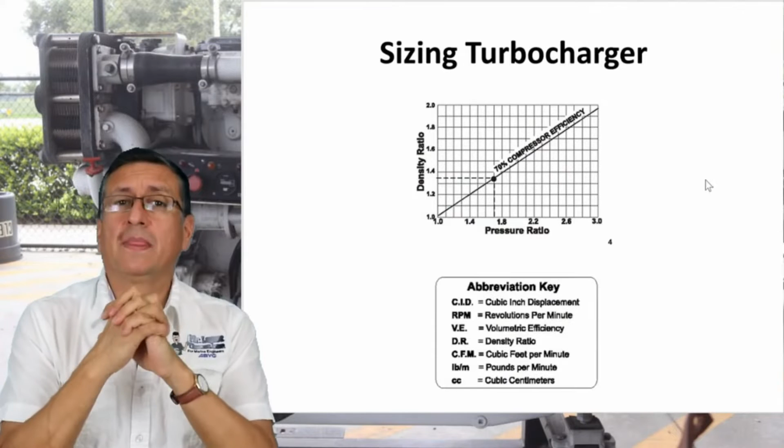The first step is verify with the manual of the engine, verify with the manufacturer of the engine if that engine is recommended supercharged. If the manufacturer recommend install a turbo or supercharger on that engine.

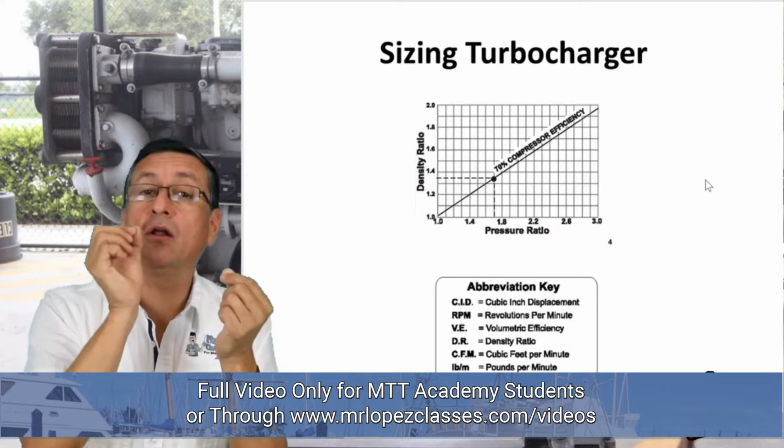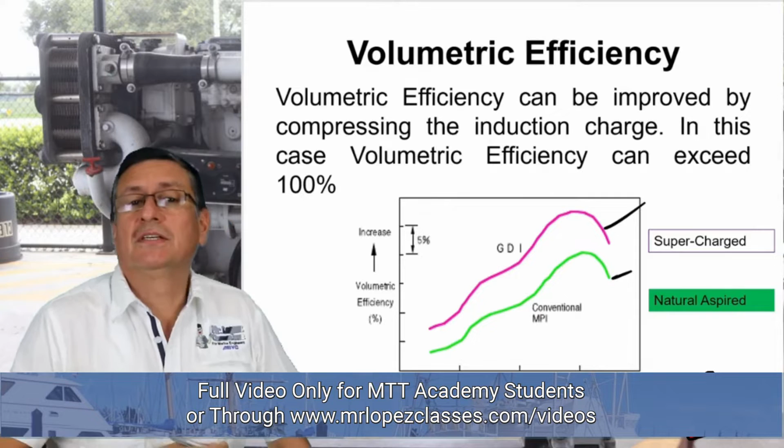This is good. Okay, we are going to verify what happened. How is that procedure? Look at this. In a typical diesel engine naturally aspirated, the volumetric efficiency is around 85%. In decimal terms is 0.85.

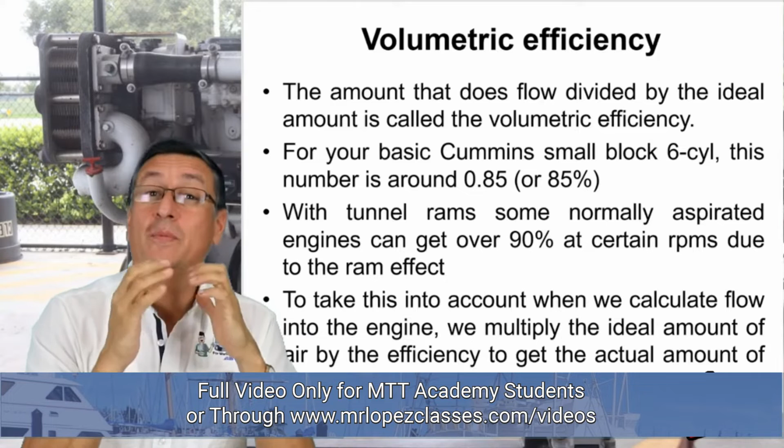But when you port the head, when you polish the ports, the intake ports and the exhaust ports, the volumetric efficiency increased 5%, around 90%. If additionally you added the turbo or the supercharger, you are in the limit in 100 or a little higher. Wow. Alright? If you have the chance, port the head. Polish the port, the intake ports and the exhaust ports.

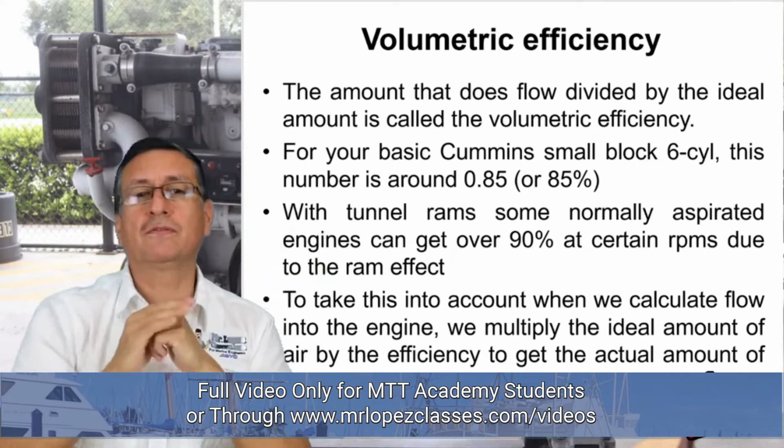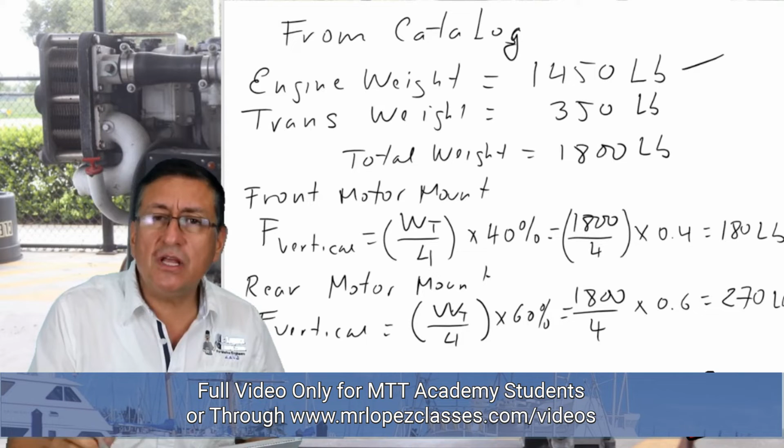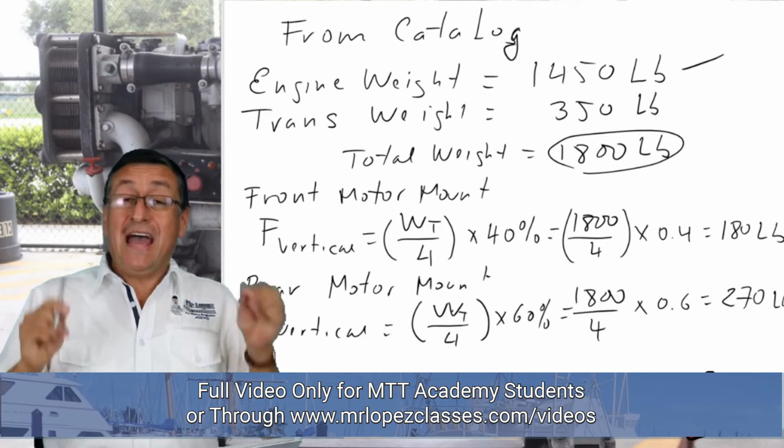Other important recommendation. In this particular example, the weight of the engine is 1450 pounds and the weight of the transmission is 350 pounds. Okay, the total weight is 1800 pounds for this type of engine. This is a C series. Alright, now because the weight, we are going to calculate the vertical force in the front motor mounts and the vertical force in the rear motor mounts.

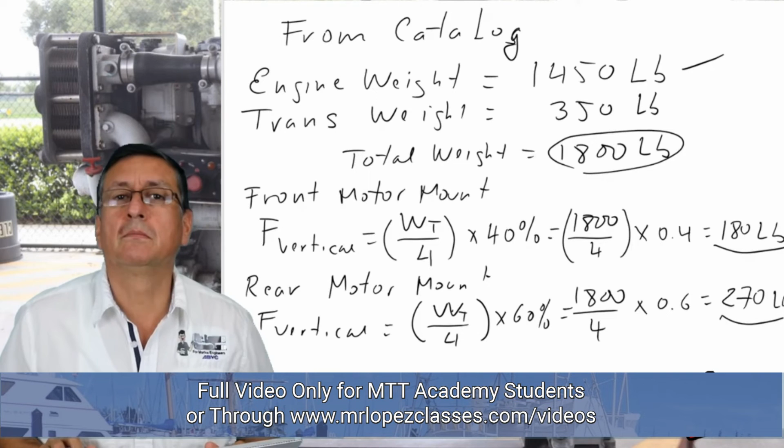In the front motor mounts is the total weight divided by 4, 40% of this. Okay, is 1800 divided by 4 times 0.4 is 180 pounds per each front motor mount. In the rear motor mounts, we have the total weight divided by 4 times 0.6 is 270. This is the vertical force because the weight.

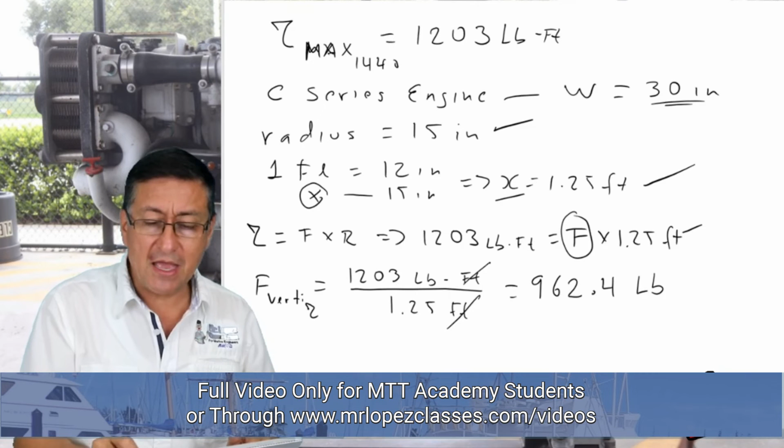The torque 1203 is equal to the force times the radius. Okay, the vertical force because the torque will be 1203 divided by 1.25 feet, and is 962.4 pounds. This is the vertical force produced because the torque of the engine.